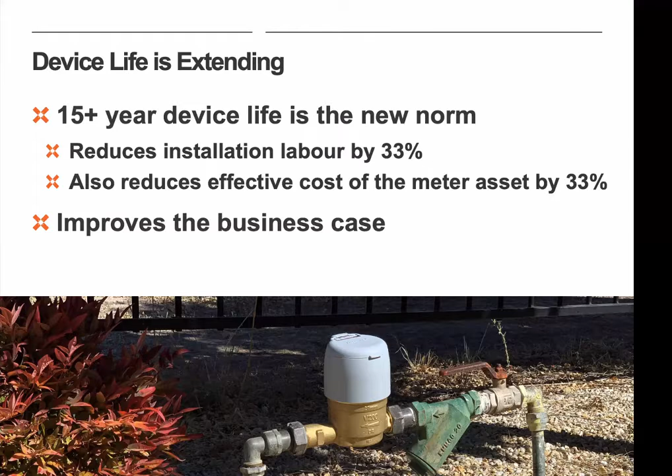The other thing that we're seeing that's emerged recently is that software is absolutely essential in every smart meter rollout. In the early days, there were utilities that experimented with rolling the technology out and using spreadsheets and their existing billing systems, etc., to be able to manage the billing data. But the sheer volume of data that comes from smart meters quickly overwhelms a spreadsheet. Even a small town can generate 500 million rows of data every year. And you can't process that sort of information by looking at a spreadsheet.

And things like billing systems, ERP systems, even lots of analytic systems are not really designed to handle that volume of data. And one of the things that's really important in understanding smart metering data is that the system doing the analytics on that needs to understand what it is that it's looking for. So we're finding that over the last few years, every single project that we've done has come with a meter data management system as part of the requirements. And these specialized pieces of software provide the utility the ability to do leak detection, to provide the customer engagement platform, to impact the demand of water, and provide the interfacing through to the billing system without overloading the billing system with unreasonable amounts of data.

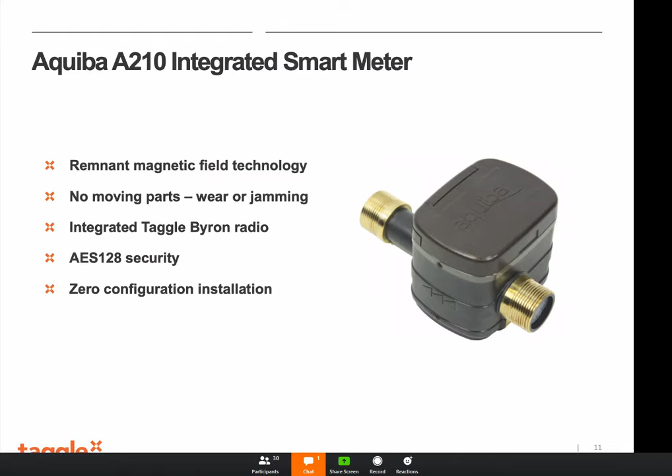So we're finding that as the sophistication of the meters is increasing, that provides additional information through to the water utility about what's happening on the network. Real-time feedback from the network meters correlated with information about consumption meters is particularly powerful for identifying potential leaks in the network, looking at mass balance. And I'll come to that a little bit later when I talk about the software used to analyze a mass balance in a district metered area.

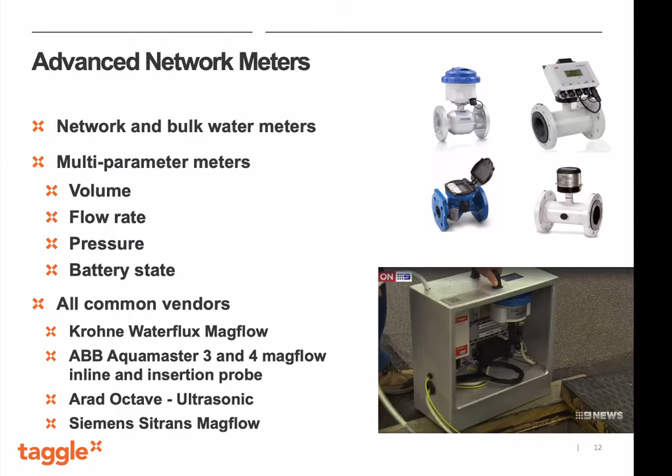Something we've been working on for an extended period of time, but we think is maturing just over the last year or so, is the extension of this same sort of smart water technology into the wastewater network. It was very surprising to me when I first started looking at this, that the only notification that a water utility has that there is a sewer blockage causing an overflow is when a customer rings the utility and says, I can see sewage in the street.

Sewers are effectively dark assets. There's no instrumentation in most cities' sewer networks, and I don't think relying on the public to alert that there's a sewer issue is going to be acceptable for very much longer.

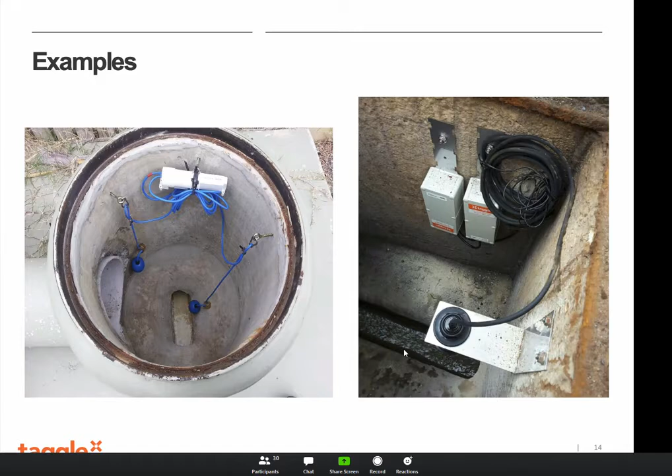It's a very, very accurate technology, down to millimeter accuracy. And it's got some sophisticated digital signal processing in the sensor head that can detect the difference between the sewer level, the water running at the bottom, and the concrete apron that forms the bottom of the well. So it can ignore the concrete and focus just on the sewer level.

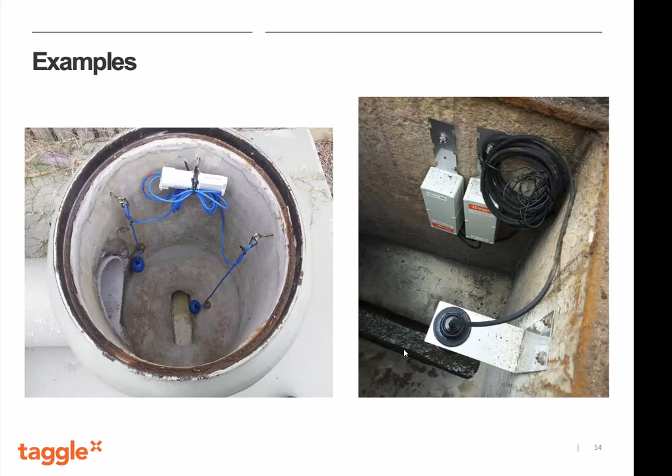Those two sensors provide different granularity of data and can be used for slightly different purposes. But what we're seeing is that these sensors can be installed and be expected to operate in the sewer for as long as 5 or potentially 10 years. And the data that provides can substantially reduce the occurrences of sewer overflows.

Probably the most interesting part of this sewer monitoring, certainly the most interesting projects recently, have actually been conducted by SA Water, where in addition to the smart network monitoring that they've been doing in the Adelaide CBD, on Kangaroo Island and in Port Lincoln, they put a whole lot of different types of sensors into the wastewater network. So SA Water are not only looking at the level of the sewage in the network, they're also looking at the speed of the flow of the material.

They're looking at gas concentrations in the pipe that lead to corrosion and damage to the pipes, as well as any metal infrastructure. They're looking at the concentration of odor-causing gases in the air, which is the major cause of customer complaints about sewage, and looking at air quality and weather behaviours and correlating all of that data together.

The outcomes of the smart sewer network in South Australia, probably the most significant one, at least in my view, has been that sewer overflows that would previously reach the surface and impact the public can now be predicted with 2 to 3 days' worth of notice. It appears that the most common causes of blockages in the network tend to be tree roots. Tree roots tend to block the network over days, not instantaneously.

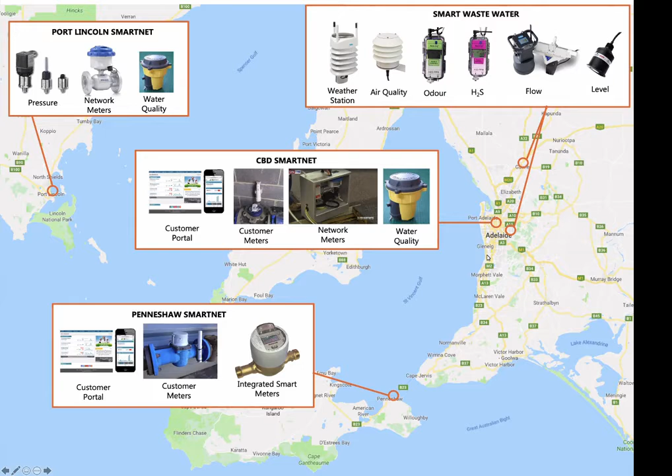One of the things that we're seeing more now in these low-cost sensors is that it's not the individual sensor that can tell you the whole story by itself, but the correlation of sensors and groupings of sensors, that when you combine that data, you get new insight.

So one of the things that we see in the sewer monitoring world is that particularly in the tropical north, it's rainwater that is the greatest cause of overflow events. There's just so much rain, particularly in tropical North Queensland, that the water is getting into the sewer network, overwhelming the capacity of the pipes and forcing overflows, often in very unfortunate places where, even though the overflow fluid is quite dilute, it can still be in contact with members of the public.

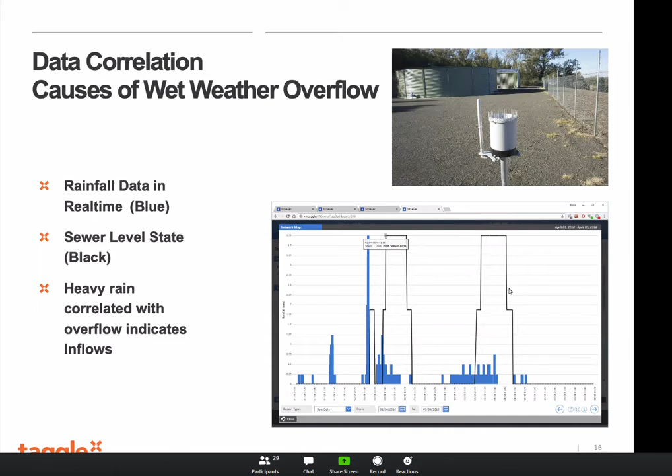Chris Manning's made a point that the ultrasonic level sensor allows you to see rate of rise, so you can diagnose infiltration problems without relying on an overflow event, which is an interesting point. That's absolutely true.

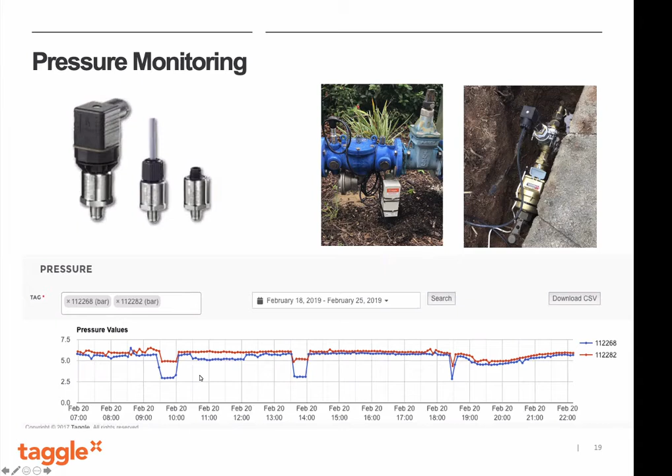The pressure in this network was suffering significant drops in pressure. This one here, where it drops to almost 2.5 bar, is below the service level committed to their customers by this particular utility. Customers were actually complaining about low pressure. And it wasn't until the sensors were installed in the network that you could see that the low pressure was actually an intermittent event. And surprisingly, quite a periodic event. There's one there, there's one there, there's one there, where the pressure in the CBD of Townsville dropped substantially, but only for maybe half an hour, even less in this period of time here. It was enough for customers to notice and to complain about.

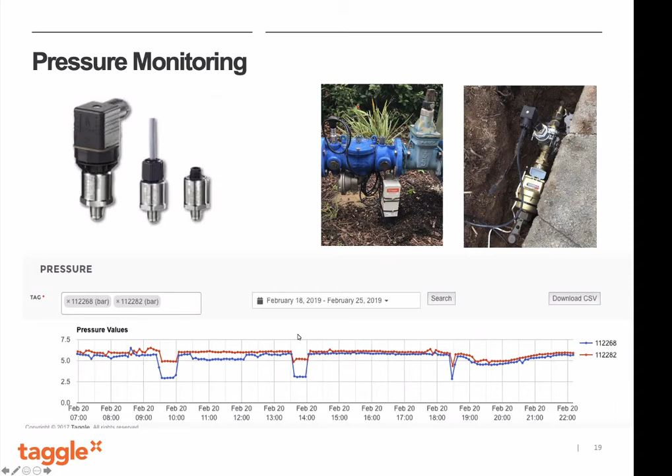But the root cause of that wasn't immediately obvious. It wasn't until somebody noticed that the supply to Magnetic Island, which is off the coast of Townsville, actually comes from a pipeline, which I think is just north of Townsville. And that periodic drop in pressure was the result of the reservoir on Magnetic Island, the float valve opening to fill the reservoir. And it was dragging so much water out of the CBD of Townsville that it was causing the pressure drop. So rather than having to go to expensive pumping stations or pipeline duplication, this problem was actually resolved very quickly by just reducing the capacity of that pipe, putting a flow restrictor at the end of the pipe. And that would resolve that pressure problem that people were complaining about.

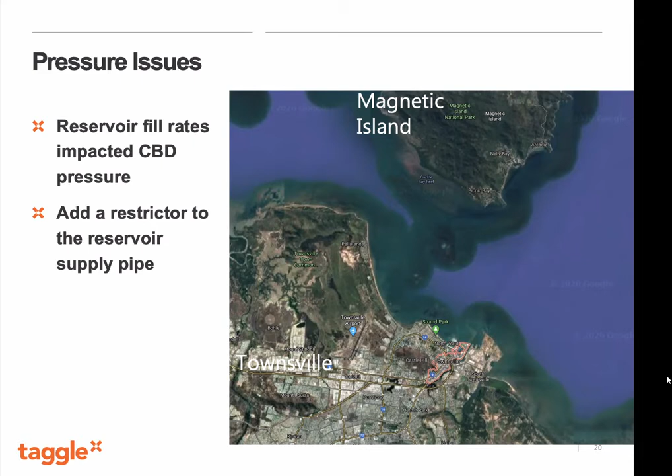Very, very low cost sensors in place for an extended period of time can provide insights into the network that people just absolutely didn't expect. When Townsville first did this analysis, they spoke to the water engineers and said, well, what pressure should we see in our network? And they said, oh, you'll never see anything more than 10 bar. And so what we supplied for the pilot project were 10 bar sensors. What we quickly discovered, though, is that the pressure in the pipes in Townsville does fairly regularly exceed 10 bar. Those pressure sensors were maxing out at their maximum scale of 10 bar. And so the next tranche of pressure sensors installed are 16 bar sensors.

And so there are overpressure events, very short transient events occurring in the Townsville reticulation network. And these overpressure events run the risk of damaging infrastructure. 10 bar is quite a high pressure for a reticulation network, and it can not only increase the possibilities of leaks or bursts of supply lines, but also potentially damage customer infrastructure. So again, low-cost sensors identifying problems that people hadn't previously anticipated.

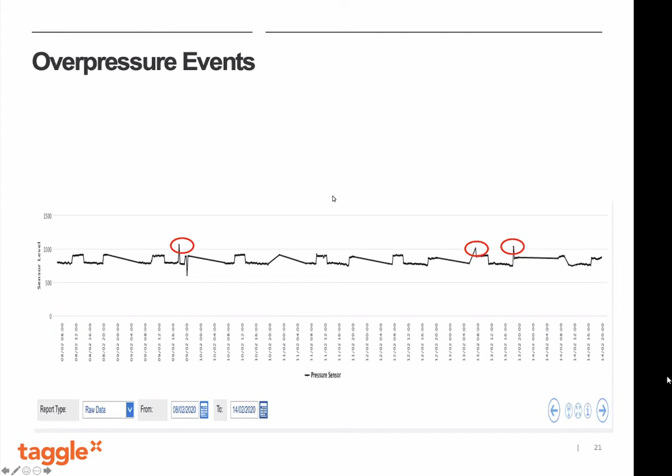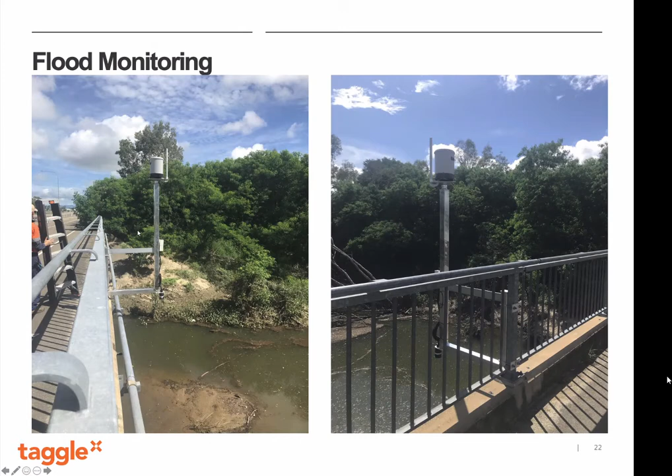And then the third one, which might not apply to many utilities, but if you're in a regional council and the stormwater channels are part of your scope, then the same sort of technology can be used for river monitoring. So here's two photos of the same installation on a river in Townsville, where they're using that same ultrasonic level sensor that we were using in the sewer and the same rain gauge we were using for sewer monitoring to actually look at rain and river levels and see whether or not this solution can actually add data to the flood modelling in the area.

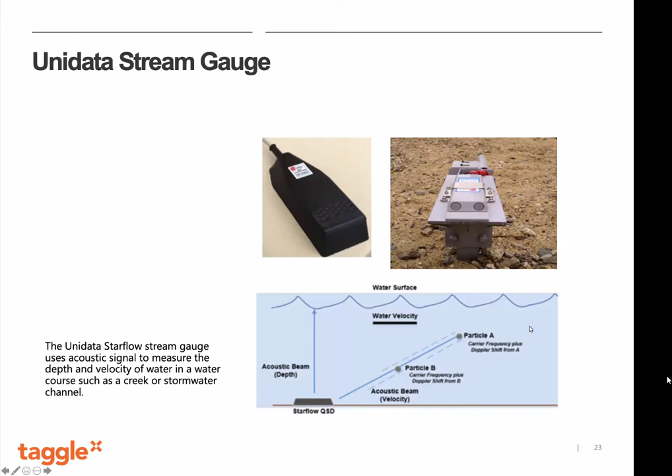Similarly, there are other sorts of sensors. These ones get installed on the bottom of either a stormwater channel or some other sort of waterway, and use ultrasonic level to detect the level of water that's above the sensor and the speed at which the water is travelling.

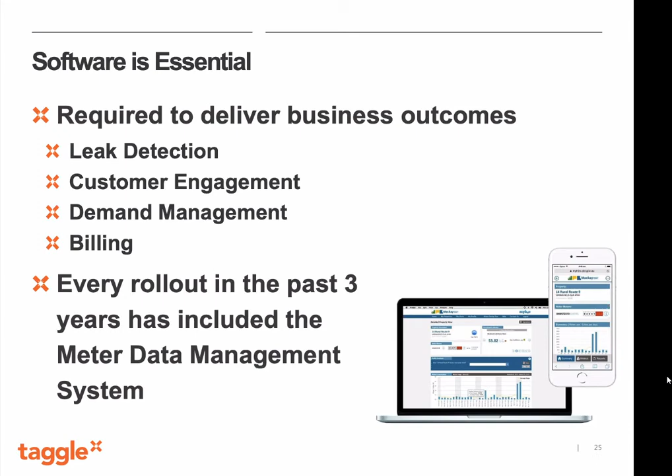I think I touched on this a little bit earlier, but software is an essential part of smart metering. The volumes of data, the types of data from hundreds or thousands or tens of thousands or even hundreds of thousands of sensors can quickly overpower and overcome the traditional analytics tools. So in the Taggle suite, we have a product specifically for meter data management. This is a product originally developed by Mackay Regional Council. Taggle took over the reins of this product at the beginning of last year and have been investing heavily in the development of this software.

MyH2O includes three major components: a meter data management system specifically designed for managing the relationships between smart meters and properties, the people who live in those properties, the installation and maintenance records, but also the algorithms associated with detecting leaks on the property itself, customer side leaks, as well as looking at mass balance on the district metered area to look at network side leaks. It includes a field tablet app that's used for efficient installation and maintenance of smart meters and other sensors, and a customer portal that allows a utility to share this data with their customers very, very quickly.

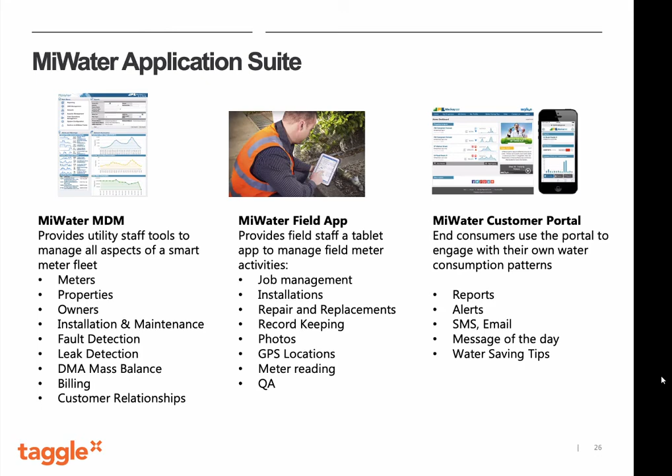And looking at this data and using computational methods to look across the tens of thousands or hundreds of thousands of properties, the software can very quickly identify leaks. And small leaks in customer properties can very quickly turn into very big leaks. So the software is designed from the ground up to understand all of this and understand what a leak looks like, and to have algorithms to be able to detect those.

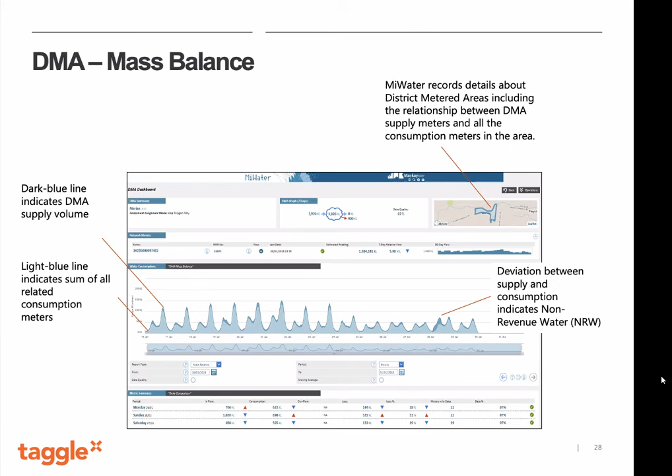And that lump there, the difference between those curves, that's non-revenue water. That's water that was produced but wasn't billed to anyone. And that could be unmetered consumption, it could be a standpipe, it could be a fire hose or a fire service being used. And the size of that can be quite significant in terms of dollars.

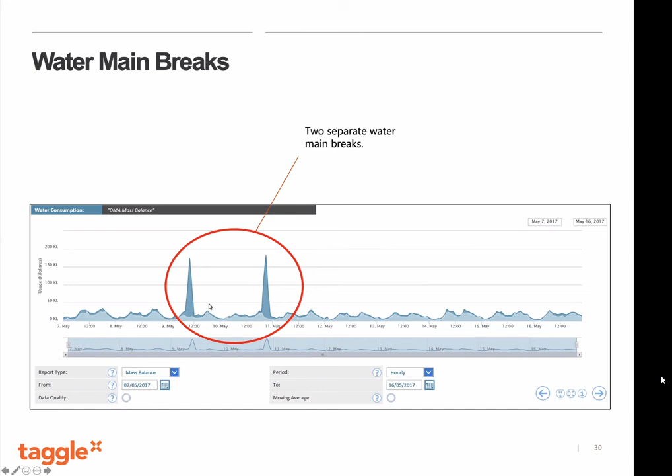That's just a zoom in on that function. When you look at mass balance with high granularity data over time series, then the profile of what's going on in the network stands out very, very clearly. These are two mains breaks that occurred 2 days apart. And you can see how clearly the difference between the water supplied and the water billed stands out on that sort of chart.

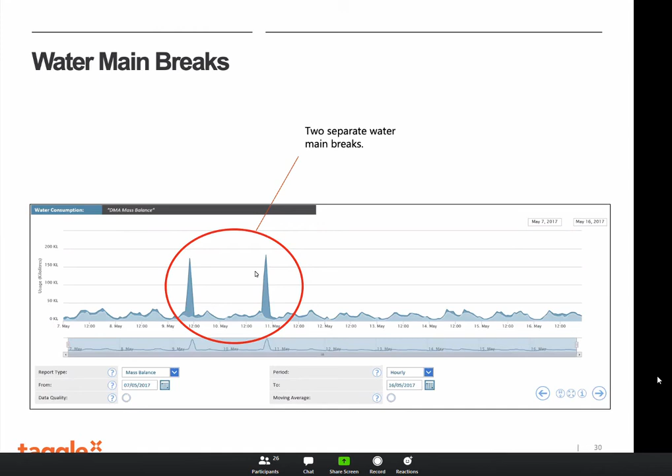We'll take a breath for a moment.

I'm just about to switch to the discussion about MiSewer. That chart I showed you earlier with the inflow and infiltration and the correlation of rainfall and sewer levels is the MiSewer application. I think I've already mentioned that this product's been in use at a utility for a number of years. We're now making that available to all utilities.